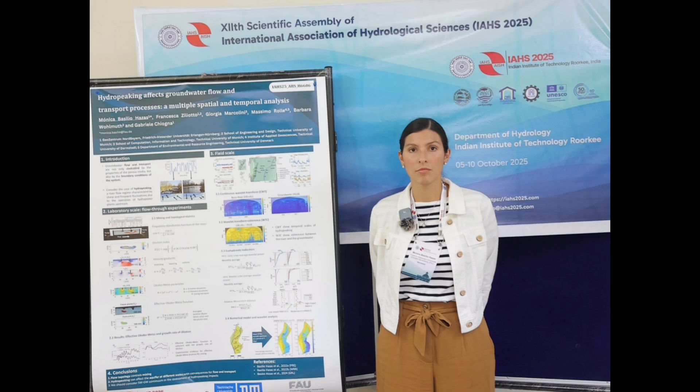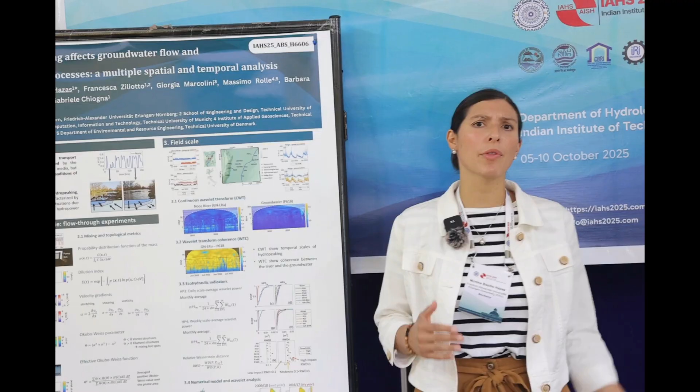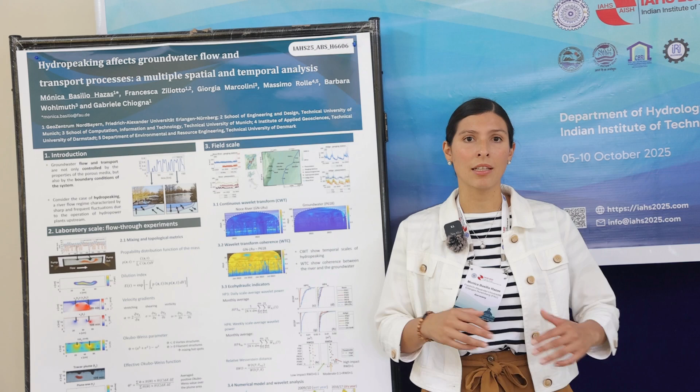I'm from the University of Erlangen-Nuremberg, and I'm going to talk to you about the effects of hydropeaking on the groundwater flow and transport at multiple spatial-temporal scales. So as you probably know, the groundwater flow and the transport of either contaminants or other solutes can be affected not only by the properties of the aquifer, such as the hydraulic conductivity, but also by the boundary conditions of the system, such as a river.

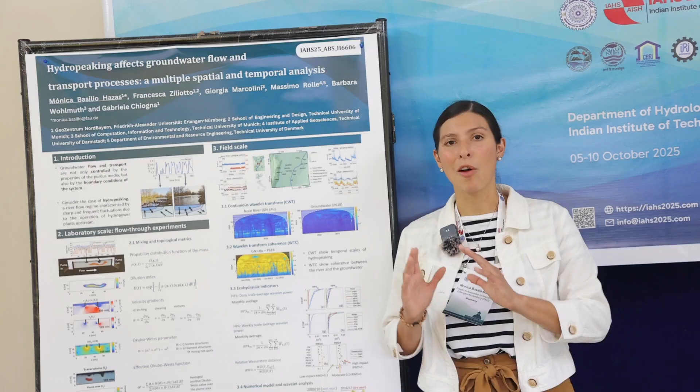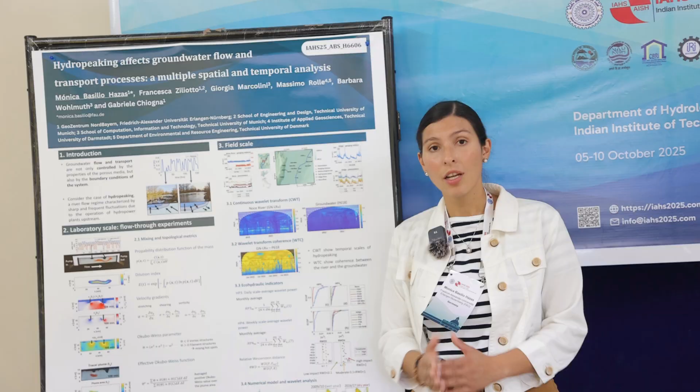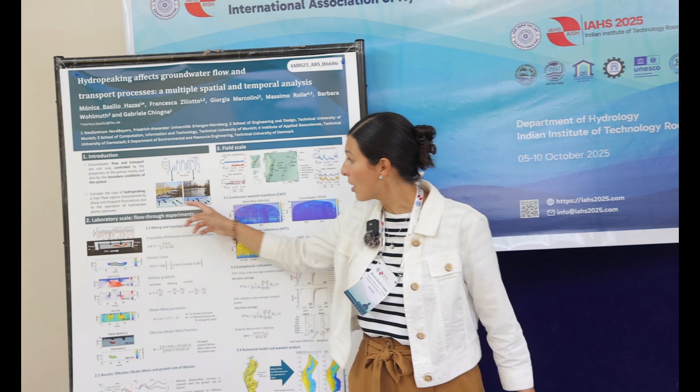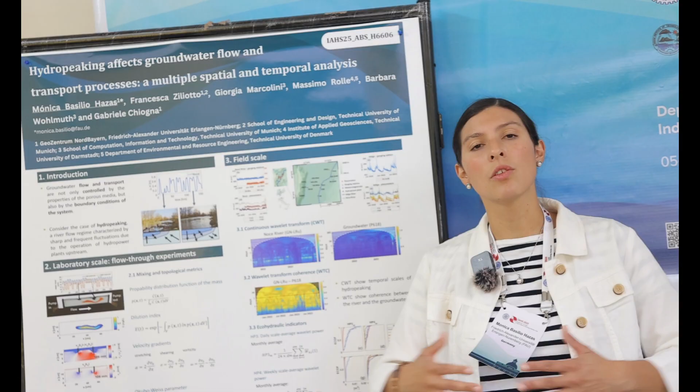Now, coming to the term of hydropeaking, what is hydropeaking? Well, hydropeaking refers to strong and sharp fluctuations in the water level of the river due to the generation of electricity, so due to the operation of a hydropower plant upstream. If you look at these pictures, you can see how the river is changing within a matter of hours due to these operations, and that can have consequences for the groundwater in the hyporheic zone, but also maybe for farther areas. And we wanted to study this.

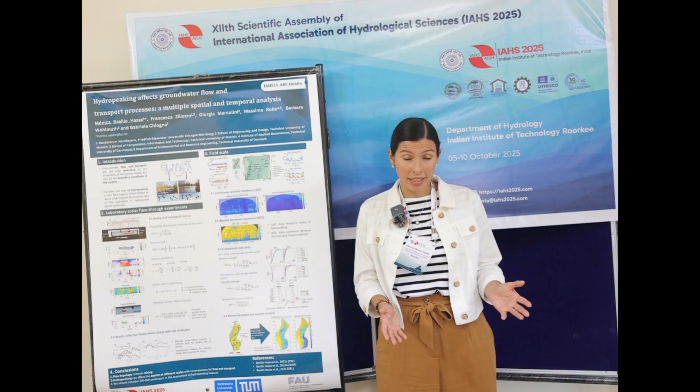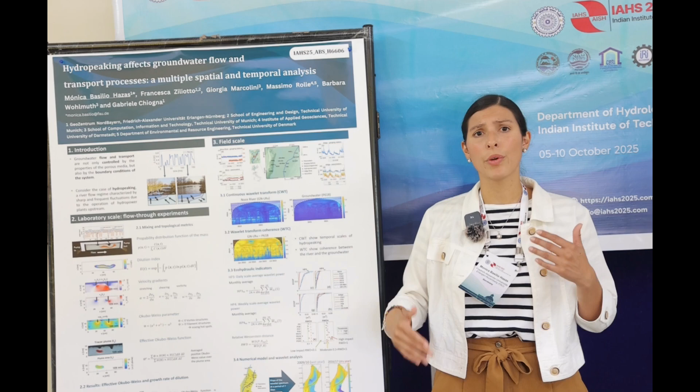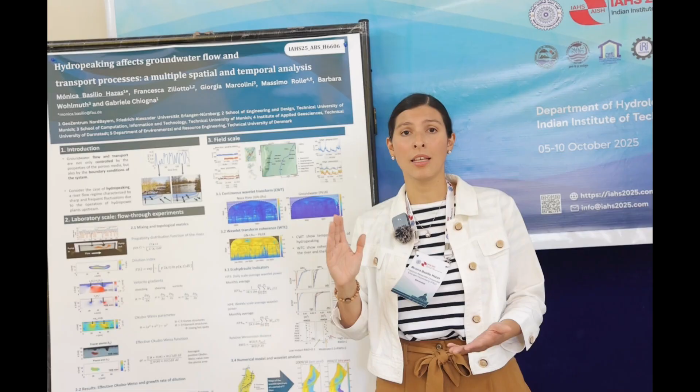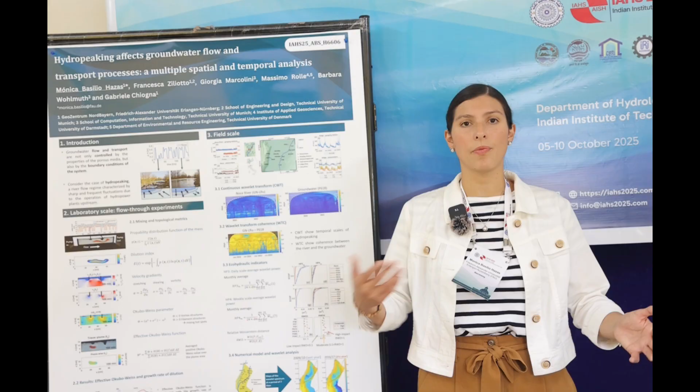So how did we do it? We had two approaches. One was by doing laboratory experiments at a relatively small scale and analyzing the mixing processes. So we had a flow-through experiment. We injected a solute plume. We simulated changing hydropeaking patterns. We analyzed the dilution of the plume. We analyzed the flow field, such as velocity, changes in velocity, topological analysis, and we tried to observe how the flow topology was affecting the mixing processes, which was this part.

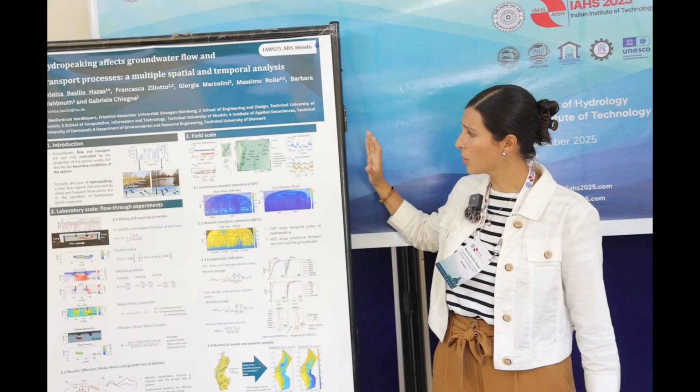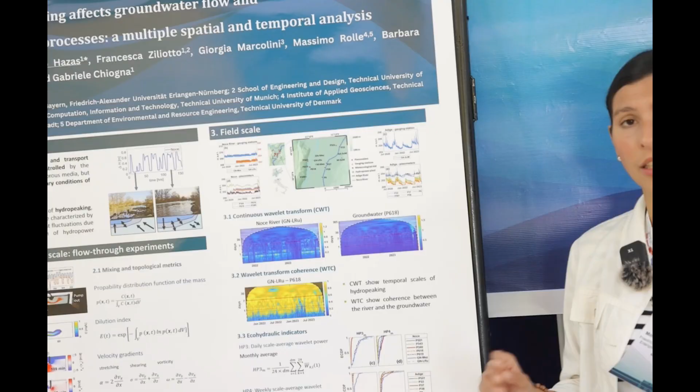Then, on the other side, we went to a larger scale. So we are working in an aquifer in the Adige Valley, in the north of Italy. And we have installed several piezometers. We have been analyzing changes in the river level and rivers affected by hydropeaking. We saw how the time series of the river was changing and was coherent with the groundwater through wavelet analysis.

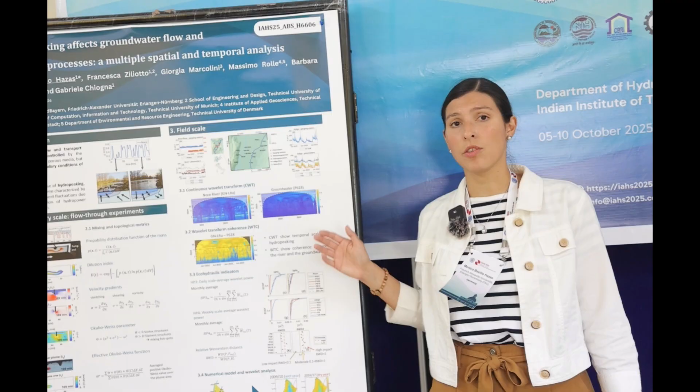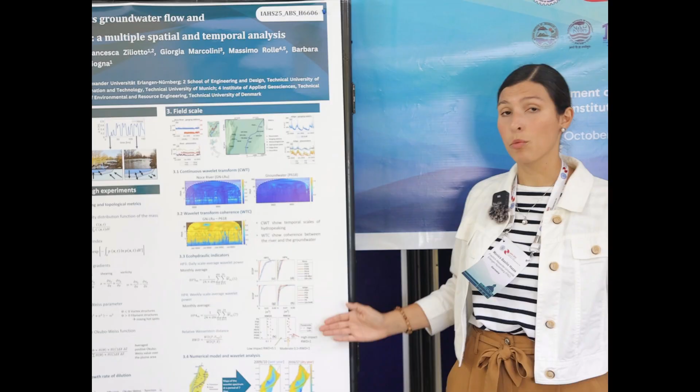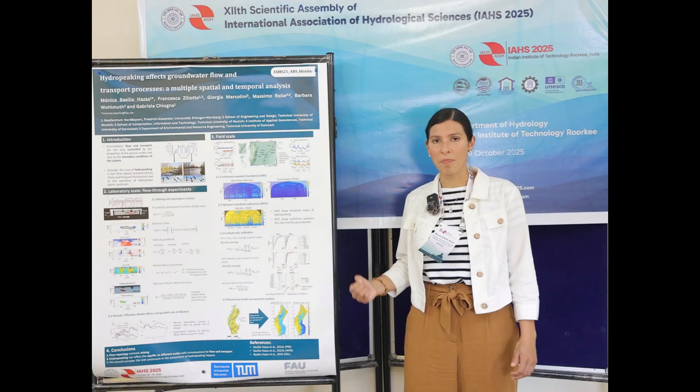We also came up with some indicators to study how strongly the river was affected by hydropeaking and how strongly the groundwater was affected by hydropeaking. Finally, we also did a model of the aquifer in order to observe how the stronger signals of hydropeaking were impacting the entire valley. With this, thank you for your attention and stay in touch.